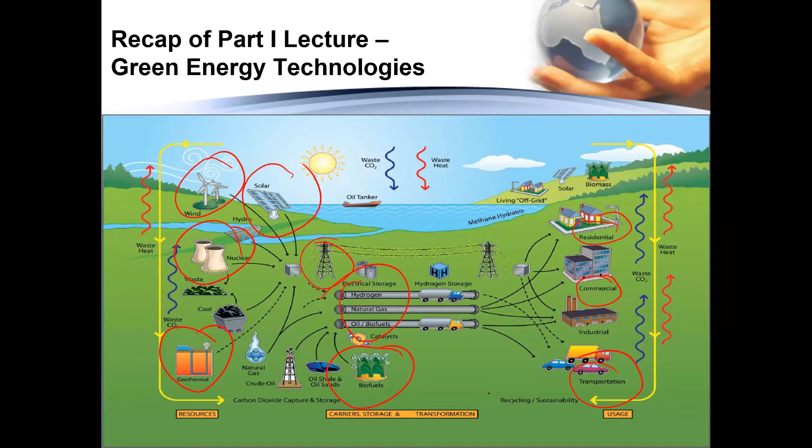This was again the last week's recap about solar PV. We just understand how energy from the light, from the sunlight, is converted directly into electricity, or you can convert the energy to electricity by hydrokinetics. That means you take the kinetic energy of the hydro, the water dam, and you move the water from the upstream to the downstream, converting that energy of motion of the water to run your steam turbine. The turbine will produce direct electricity which you can use for transmission.

Or geothermal energy, wind energy - we use a wind turbine to convert mechanical energy into electrical energy. Solar thermal energy, where you use solar light for warming up your liquid in a solar collector. You can use solar thermal power for steaming your water, and the steam turbine can work and produce electricity, or use a solar water heater. These are technologies which are available and have been known for many years now.

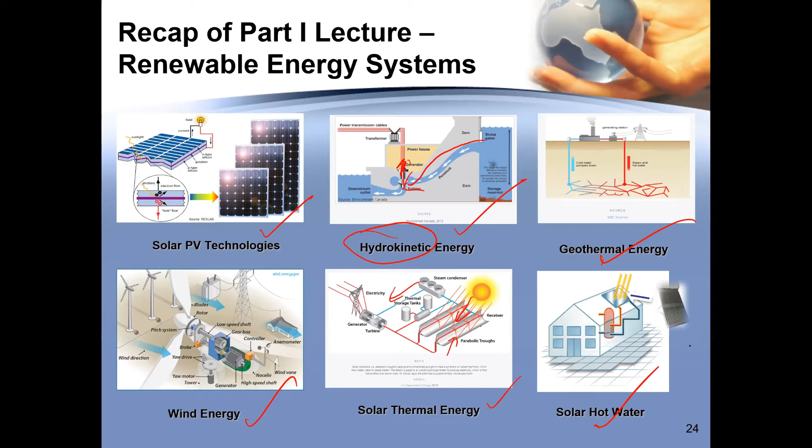Then we discussed another form of energy which is clean, with less global carbon footprint - biomass. We use biomass from the feedstock for bioenergy. That biomass is combusted in biomass combustion. In biomass combustion, we use carbon dioxide in photobioreactors to produce biofuels. The biofuels are a liquid combustion fuel which is reduced from the CO2 or the carbon.

So you have a biofuel which is like 10% ethanol - you use 10% ethanol, meaning you can reduce the combustion of carbon by 10%. Then you can use the biofuel, and the fuel cell works with the biofuel.

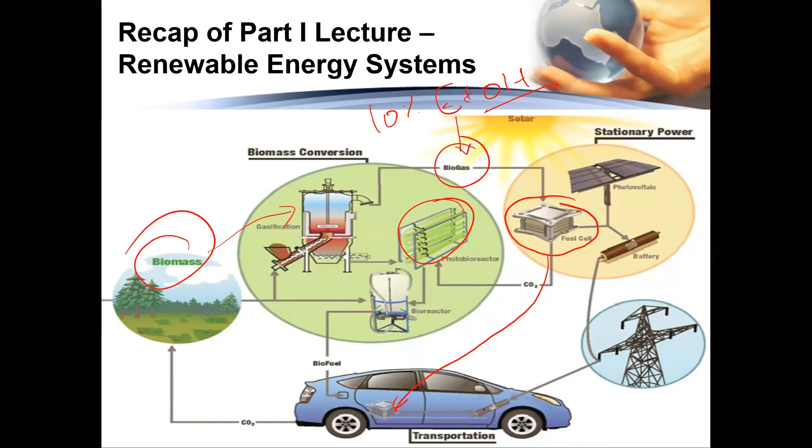The biofuels, the fuel cell is stacked into the car, where the biofuel can produce the energy that can convert into electricity, or probably can use direct combustion of the biofuel for running your transportation sector.

Now we are going to compare the technologies. Solar photovoltaics is little expensive, about $5,000 to $10,000 per kilowatt. Solar thermal is $3,500 per kilowatt. Wind turbines is much less expensive, $1,500 per kilowatt. Coal combustion turbines are a little less. Because the technologies are matured enough, now the price goes down. As all the prices go down, you can use more of a mix of renewable energy into the fossil fuel usage in many other sectors.

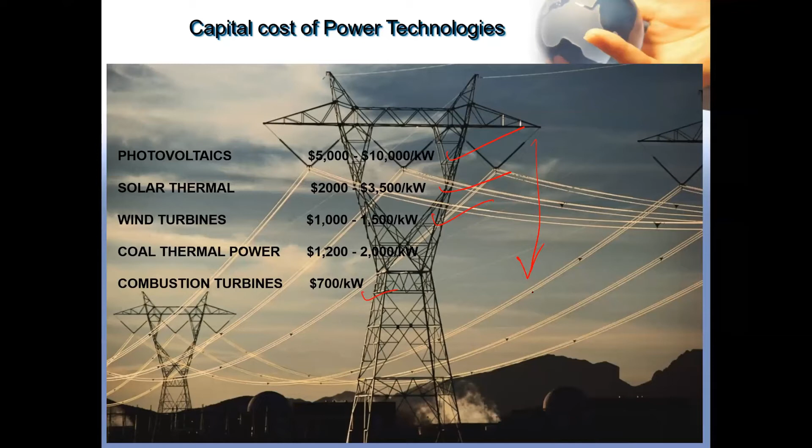So I'm going to start actually a real part 2 from the next slide. Overall, we wanted to reduce the carbon dioxide footprints. The carbon dioxide is the one which is dumping on the atmosphere that is invisible, unlike your India Gate or the mountains like Himalayas. The carbon footprints are reduced by several means.

Either you can dump the carbon dioxide into the ground storage or geological storage, or you can store it in minerals like limestone or dolomites. In our research, we try to capture the CO2 into the limestone, and then we can use the limestone for disposing, effectively taking out the carbon dioxide from the atmosphere.

Or you can use the CO2 for production of plastics or any other industrial usage, or you can use it for electricity generation. The carbon dioxide is used as a feedstock for your biomass, or you can also use it for petrochemical or cement production. That way the carbon dioxide is used in many ways so that you can reduce the footprint of carbon dioxide from our atmosphere. That's our overall goal.

What is the best way to do that? Another switch here, I want to switch the gear and look for the electric, pure electric, the smart grids. The smart grids are very highly popular in the US, Europe, and Asia to convert different fuels into direct electricity. So you can use everything as electric power.

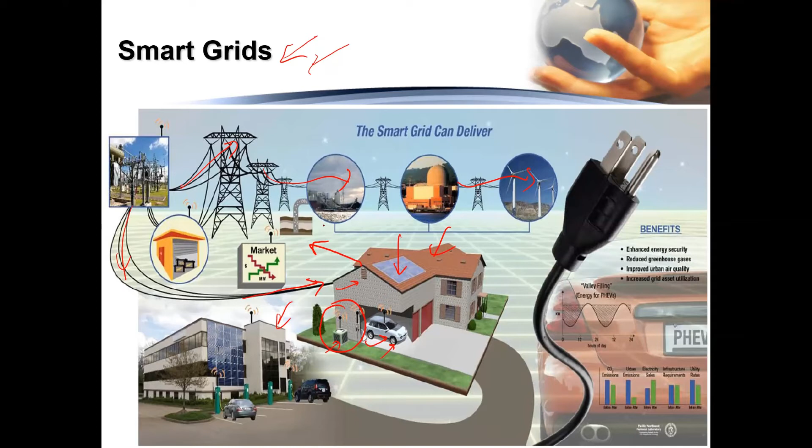That means plug-in hybrids, what we call PHEV, plug-in hybrid vehicles, which can work primarily on electric and also some gases like gasoline or any other fossil fuel. So the benefits of plug-in hybrids are enhanced energy security, reduced greenhouse gas emissions like CO2 or carbon monoxide, improved air quality, or increased grid asset utilization. So you can utilize the grid for your residential sector or the industrial sector.

Therefore, plug-in hybrids are very much into the market, where they will solve problems arising due to sun or wind. I told you last week, when there is sun, there is no problem, you can produce solar PV into electricity. But if there is no sun, it's a rainy day, how can you use the solar PV for that energy unless you have a battery, right? The same thing, if there is no wind, then you cannot use the wind turbine for electricity production.

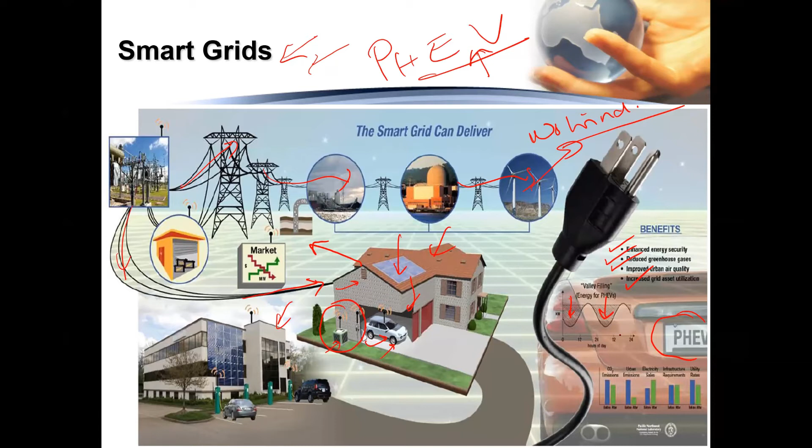Therefore, you need to have a storage medium for the peak, that's why we have valleys - the valley is for the peak. Like when there is no wind or sun, you can use battery storage, or use electric vehicles. Electricity is a primary source which is clean from carbon footprints, so you can use it for transportation, industrial, or residential sectors.

This chart is courtesy of Lawrence Livermore National Laboratory, a Department of Energy institution. In India, this is like the Bhabha Atomic Research Center or similar government energy labs. They also work with the Energy Information Administration. This chart is produced by Lawrence Livermore National Lab from California, USA, which includes a number of energy sectors like solar, nuclear, hydro, wind, geothermal, natural gas, coal, biomass, and petroleum - these are the mix they use.

At the end of 2015, energy consumption from these different sources showed electricity production at about 38, whereas the transportation sector used the same amount of energy. The transportation sector right now is fully catered to or served by petroleum gas, whereas electricity production can also use clean coal or fossil fuel. This is actually up to 2015, without electrical energy.

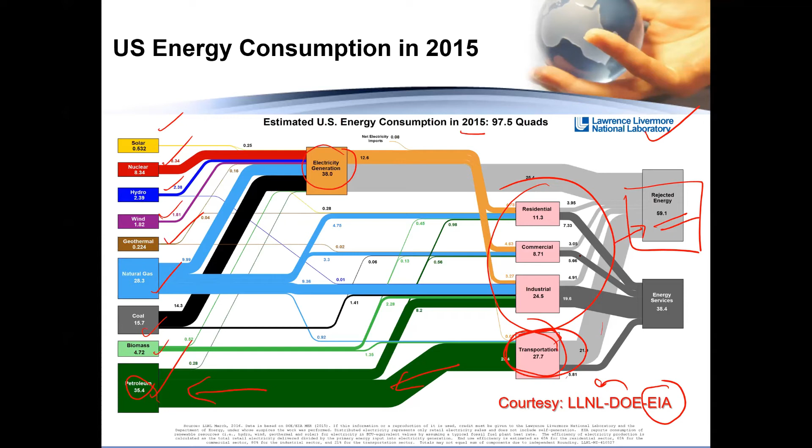So right now, for all the solar and renewable energy used for residential, commercial, and industrial sectors, energy rejection is very important. About 60% of energy is rejected after combustion or after transportation or industrial combustion - still about 60% rejection of energy, which is not very good.

Or at least hybrids, because many hybrid cars have come into the market, like Tesla, Toyota hybrid, or Nissan Leaf. They use electricity primarily for the transportation sector, therefore we can reduce fossil fuels like coal and natural gas.

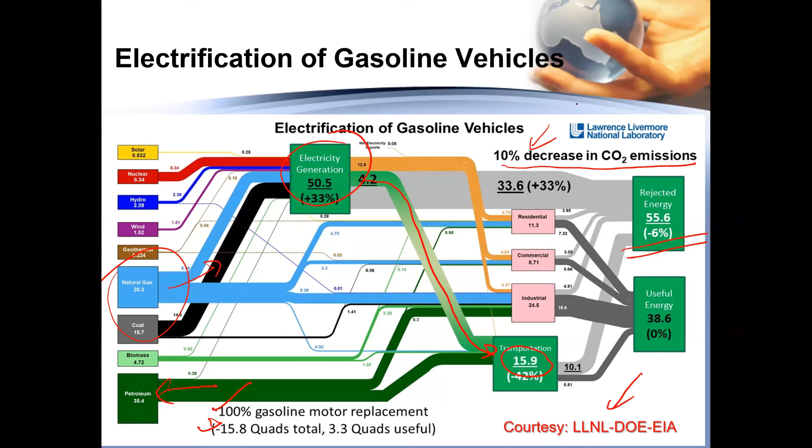So overall, this chart tells us that when you use the electric vehicle, you get at least a 10% reduction of CO2 emission from the atmosphere. So let's look at what is an electric vehicle. It's completely electric or a plug-in hybrid - they are lightweight vehicles, and they also use a powertrain, improving the efficiency by internal combustion engine.

I'm sorry, I'm running out of time.

I don't know, it is 4:56 p.m. Okay, I'm sorry, let me go, and then probably we need to catch up in the next meeting. I will finish in 5 minutes or 4 minutes.

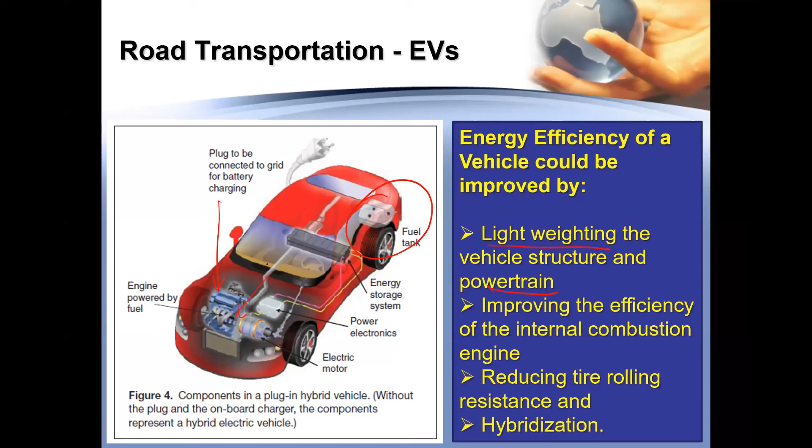Improving efficiency of thermal internal combustion engines and hybridization means going with the gasoline vehicle. You can reduce the gasoline tank and use a plug-in hybrid for your energy. Initially, you start up the vehicle using gasoline. Once started, the electric takes over and you can run on the highways or in local domestic lines with the plug-in hybrid. I'm going to stop here, because this is a whole story about electric vehicle technologies.

In 2 minutes I can cover why these electric vehicle technologies are important and what are the alternative transportation methods, like hydrogen technologies and fuel cell technologies. We'll combine these into the future presentation. Is this okay, Dr. Mishra-ji? On 21st May we will again meet and discuss the same topic, and that will be part 3 of this.

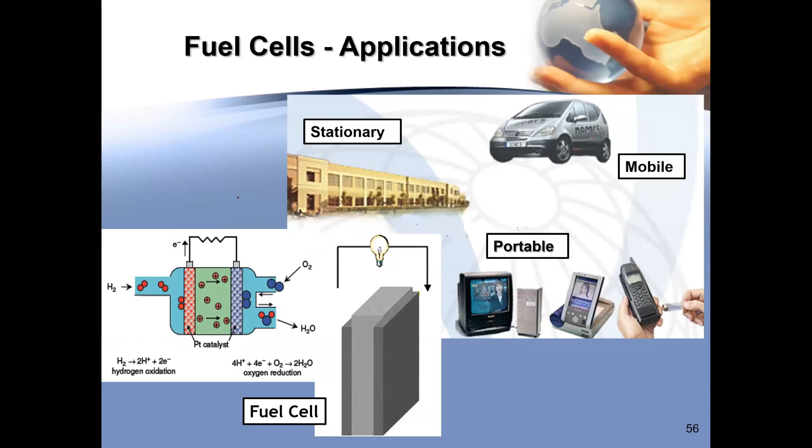Yes, sir, I want to ask why we are not using only hydrogen as a fuel, so that no emission and no pollution and no such type of problems will take place, which we are facing. We will overcome those problems if we use only hydrogen as a fuel.

Yes, we can. The only roadblock is about infrastructure. Building hydrogen gas stations for producing and handling hydrogen is not very much set up right now, like natural gas. Right now there are a lot of natural gas plants and gas stations in Bangalore, India, and many other parts of the world. For hydrogen, there are intrinsic challenges like hydrogen production, hydrogen storage, and hydrogen utilization.

We'll definitely talk about this because that's my area of research interest, I work on hydrogen a lot. But the main challenge is how you can go about building hydrogen gas station infrastructure so that it's conveniently used for transportation.

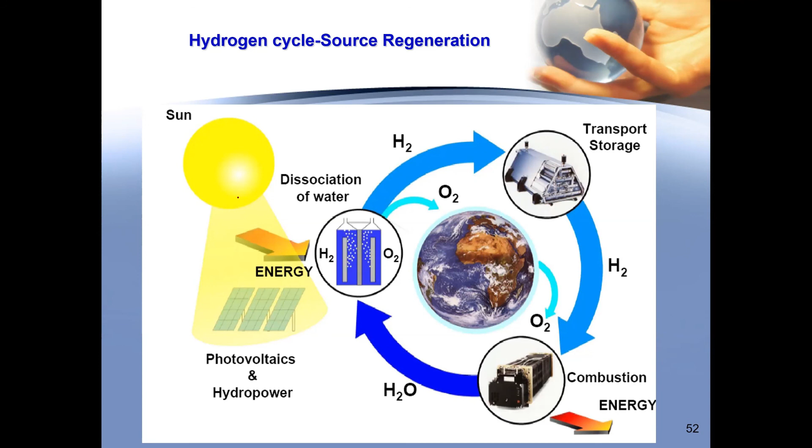So thank you, sir. We will be in that lecture to hear about hydrogen fuel. Again, we will meet on 21st May at 4:30 p.m. Any question?